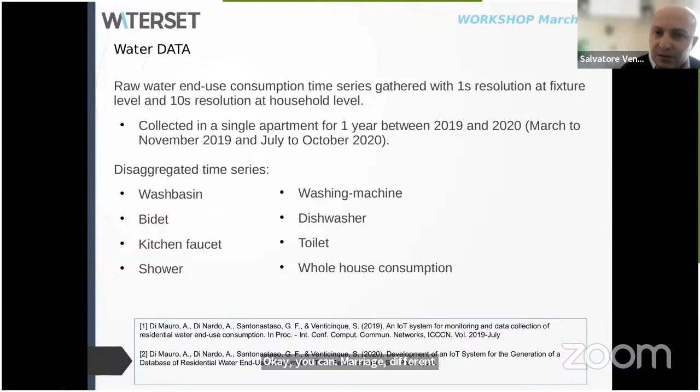Where you see different users, that is the simulation of a larger scale, and in that case you can replicate the same behavior of the same user. You can merge different profiles and vary the composition in terms of the heterogeneity of your sample.

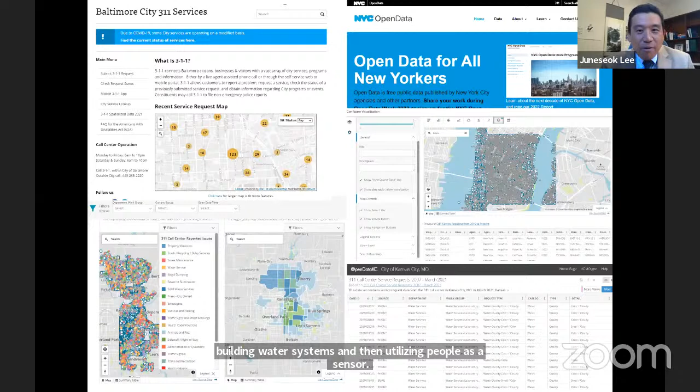Here's a snapshot of the open access data. On the left-hand side is the Baltimore City 311 service, which since around 2010 has been pretty active. Whatever problem citizens have, they call 311 or report via the 311 website. Here are some of the reported water quality related complaints. In this study we focused on New York City data, about 15,000 complaints over a few years.

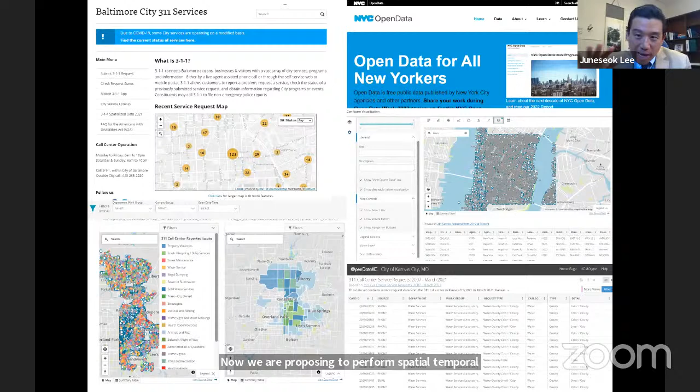Based on that, we are proposing to perform spatio-temporal analytics in terms of space and location. What's the trend? What are the hotspots? What are the emerging hotspots? What are the continuous hotspots? I hope that will be very helpful to the water utilities.

Yes, thank you for your work. I'm sorry. Okay, can I move on? Okay, yeah, please continue, please.

Based on this good actual data, we are proposing to apply different types of machine learning to find hidden trends or hidden patterns and make forecasting. Hopefully that will be useful for the water utilities in terms of their planning, operation, and management for the near future.

The objective is to perform spatial temporal analytics of observed water quality complaints, identify continuous hotspots, and develop machine learning and deep learning based time series models to forecast water quality complaints in different cities, such as New York City, Baltimore Maryland, and Kansas City Missouri.

And then we're going to compare the performance of machine learning, deep learning time series models, and have a better understanding of different types of machine learning, its capabilities, and also its limitations. And we want to make useful analytics-based recommendations for the water industry.

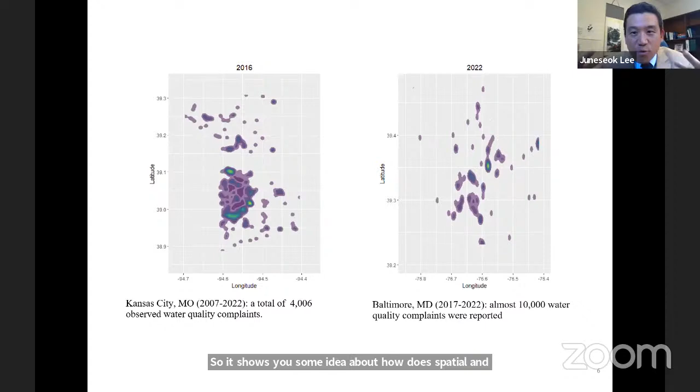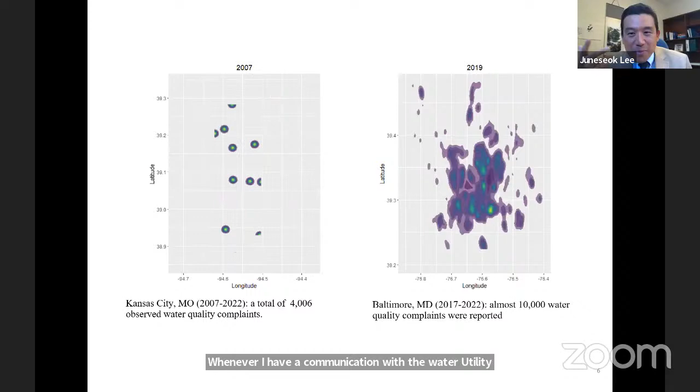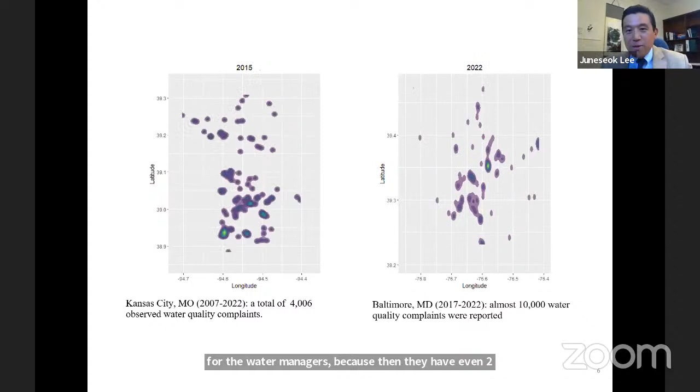Whenever I have communication with water utility directors or managers, these water quality complaints are really a pain in their neck for the water managers, because even at 2 a.m. or 3 a.m. in the morning, if there's a problem, they have to let the crews go outside and solve the problem. So how can we solve this problem?

The good thing is for the citizens, it's all transparent, but for the managers, the data is there, so it's their responsibility. So we'll have to solve the problem together, right?

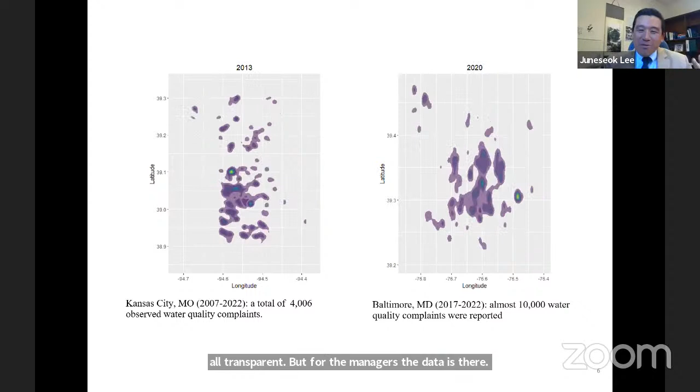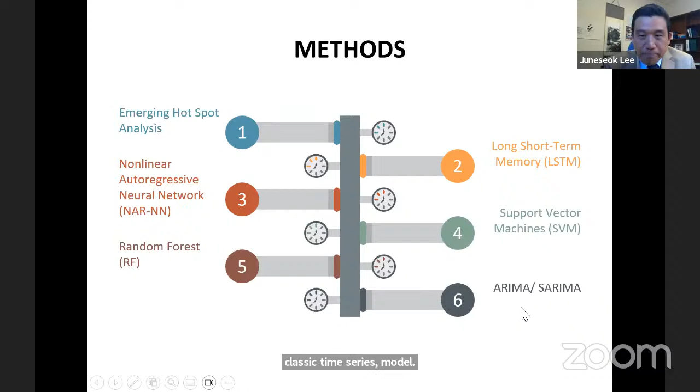So now, as mentioned, we're proposing to utilize spatial temporal hotspot analysis and different types of machine learning, for example LSTM (long short-term memory), nonlinear autoregressive neural network, the very famous SVM (support vector machine), and another very famous one, random forest. Today we are not reporting on, but we also considered very classic time series models such as ARIMA or SARIMA.

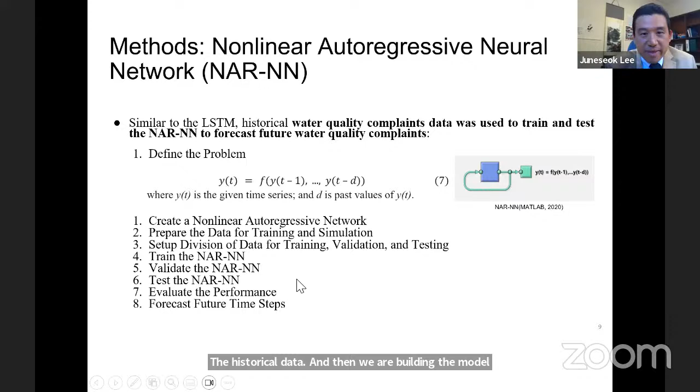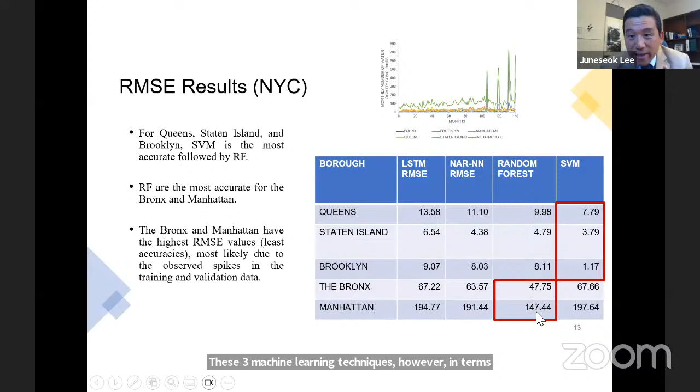Now this one is showing NYC's data. I'll talk in terms of root mean square error, RMSE result, which means the smaller, the better fit. If we compare Queens, Staten Island, or Brooklyn, it is very clear that SVM is showing the smallest RMSE values, meaning support vector machine is performing better than the other machine learning techniques. However, for Bronx and Manhattan, random forest is consistently doing a better job in forecasting, because the RMSE values compared to other machine learning methods show random forest performing better.

We thought about the reason, and it's most likely due to observed spikes in the training and validation data. Queens, Staten Island, and Brooklyn are consistently showing some near pseudo steady state. However, the Bronx and Manhattan show very unexpected high peaks in these three regions, in this time period. So we tentatively concluded that random forest is good for reflecting this unexpected spike compared to other machine learning methods. However, SVM is good for predicting in terms of pseudo steady state observation.

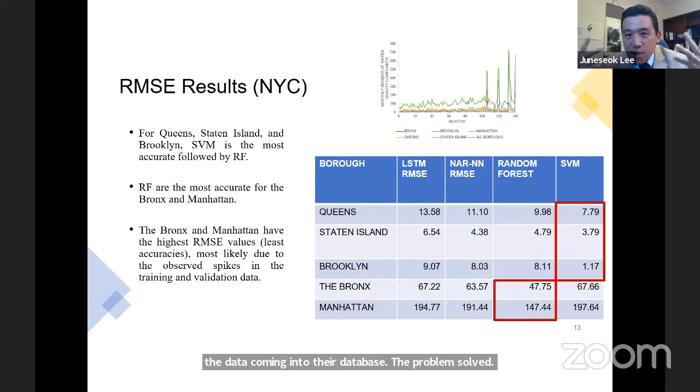We also communicated with the NYC DEP about why these three spikes are there in this specific time period. They don't know either, because those are the influx of data coming into their database. The problem is solved, but the causality, why it is happening, still bears further examination.

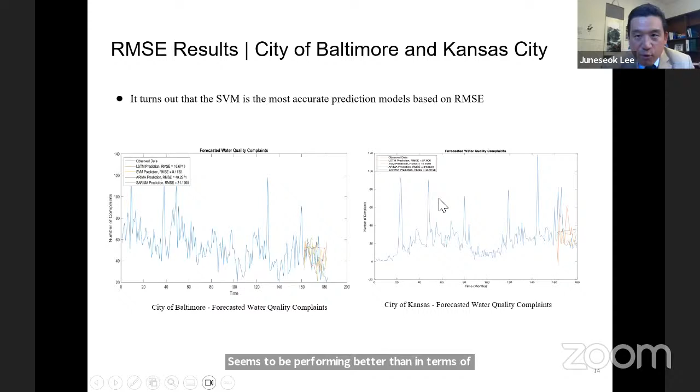My personal interest is very much in building water systems, premise plumbing, because people are the actual sensors living in that building, so they can report out in real time and also the real location.

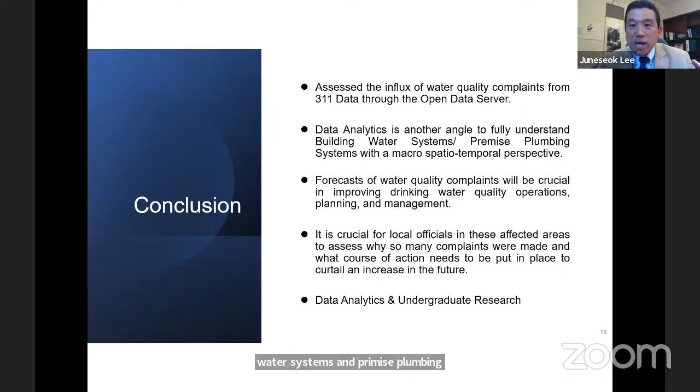So, in conclusion, we assess the influx of water quality complaints from 311 data, which is an open data server, so everyone can access that data. Data analytics is another angle to fully understand building water systems and premise plumbing systems with a macro level, spatial temporal perspective. I know lots of dedicated researchers devote their whole lives to understanding why lead is detached, like dissolved lead or particulate lead within the pipe system, using experiments or modeling. But this macro approach from the bigger scale, using data analytics, is also another way to approach the same problem about water quality issues in our water systems, and also decentralized water systems.

Forecasting of water quality complaints is very important in improving water quality operations, planning, and management, and crucial for local officials in affected areas to assess why so many complaints were made, and what course of action needs to be put in place to curtail or reduce an increase in the future.

So again, we solve this type of problem not just for us, but for the citizens, right? To help the water utilities supply water 24/7, 365 days, the best high quality water. That's our job.

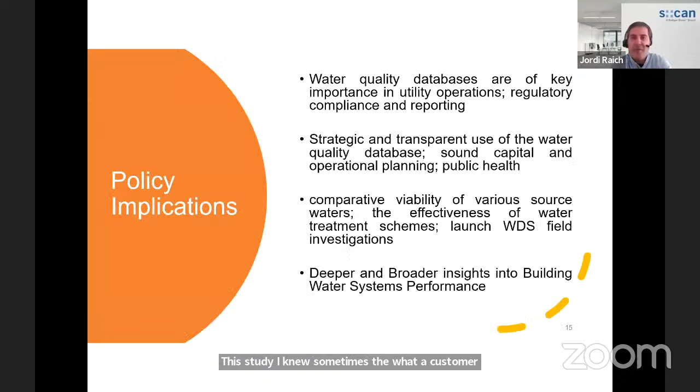Thank you. I have a comment first. I think it's very interesting, this study. I knew sometimes customer complaints are used as sensors, but this is the first time I see a study like this with so large a data set. I really enjoyed it. I have just one question.

Related to the 3 cities, were they chosen because of any relation to aging infrastructure? I'm asking because we did a project where we monitored wastewater in the city of Barcelona, and we chose 3 different districts with different income ratios: high income, mid income, and low income. The criteria was to see if there is any difference in how these districts behave at home, how they use water, etc. So I was wondering if there is also a criteria for these 3 cities, or maybe not.

Yes, that's an excellent comment, thank you so much. Actually, our follow-up study is about water equity issues. Right now we're simply displaying the water quality complaints and making a forecasting model, but we are overlaying it with household income level, education level, and median housing price levels. We're doing that in NYC, but unfortunately we couldn't find any correlation so far. That's on the to-do list as near future research. Water equity is a very hot topic these days, right? So, thank you.

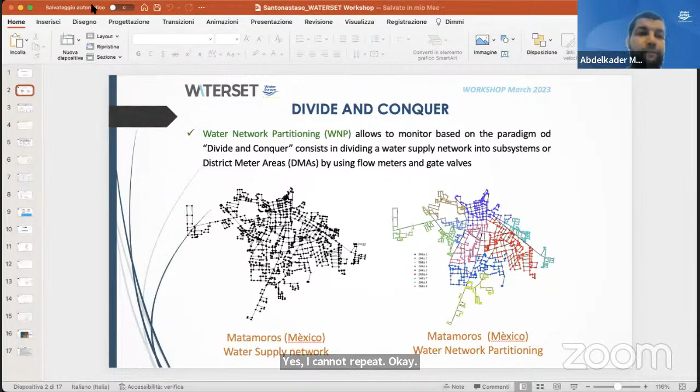Okay, just a moment. So maybe we lost Giovanni, he has some problem with connection. Maybe we can wait just 2 minutes and then go on, because we are out of time. Yeah, Giovanni, you are muted, can you unmute yourself? Do you see my screen? Yes, but do you see the slides? No, the slides, no, we see only the Zoom web page. So you are sharing your screen, but not the presentation. Okay, I can repeat. Now. Yes, so can you just make it so now you see my screen, my presentation mode? Yeah, okay perfect, thank you, sorry for the delay.

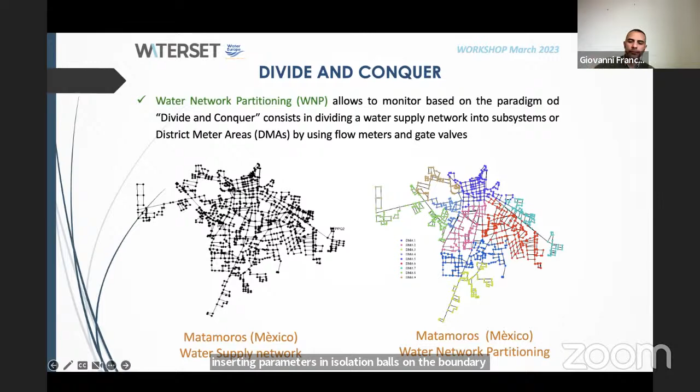So the idea of water network partitioning is based on the paradigm of divide and conquer. In general, it consists of dividing the water network into sub-networks called district metered areas, using flow meters and gate valves. Starting from the original layout of the network, we can obtain a water network partitioning by inserting flow meters and isolation valves on boundary pipes, which are pipes that connect different DMAs. There are two different approaches to the water network partitioning problem: the first is virtual partitioning, by inserting bidirectional flow meters on boundary pipes between DMAs, while the second is permanent water network partitioning, by inserting gate valves and flow meters on boundary pipes between DMAs.

In past years, the main advantages of water network partitioning are, of course, evaluation of water balance and minimum night flow, reduction of water losses by pressure management, monitoring network performance and water consumption, and protection from accidental and intentional contamination events.

But the main drawbacks are the reduction of network redundancy, because traditional water distribution systems are designed to be looped, increase of energy dissipation caused by pipe closure, and increase of management cost needed to buy, install, and repair flow meters and gate valves.

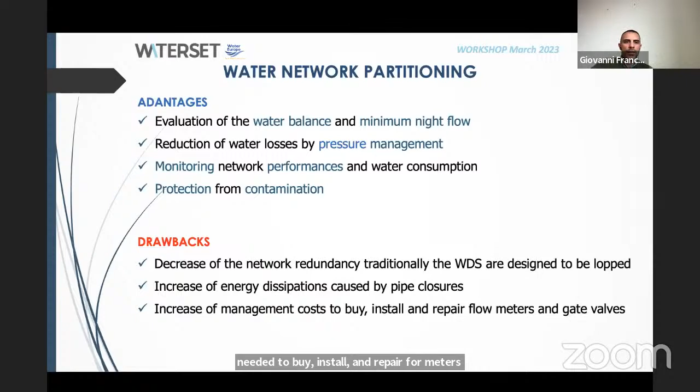In the past years, we can find in technical literature some suggestions about permanent DMA dimensions. For example, these suggestions are based on the number of inhabitants, from 1,000 up to 3,000, or from 2,000 up to 12,000 inhabitants, with a length of pipe from 5 kilometers to 30 kilometers.

Other suggestions are about the number of properties. For example, we can have small DMAs with 1,000 properties, medium DMAs with about 3,000 properties, up to large DMAs with up to 5,000 properties. But these suggestions are based only on empirical considerations and limited case studies.

So it's very difficult to apply this consideration to a large real water supply network. Generally in this context it can be useful to use an approach based on trial and error procedures, also combined with hydraulic simulation.

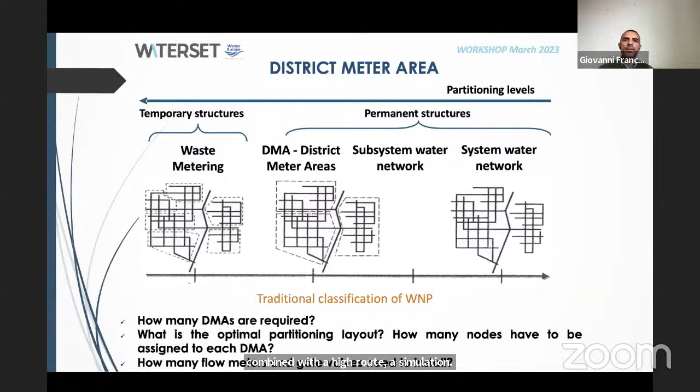Nowadays, several water network partitioning approaches have been proposed in the literature to find an optimal water network partitioning layout, and they are generally divided into phases. The first phase is clustering, and the second is dividing. The clustering phase aims to define the number, the shape, and the size of DMAs by minimizing the

number of boundary pipes or other pipe features such as length, diameter, and so on, while at the same time balancing the number of nodes of each cluster or other node features such as demand or elevation and so on.

The other phase, dividing, has the goal of selecting boundary pipes where to locate gate valves or flow meters in order to maintain the hydraulic performance of the system.

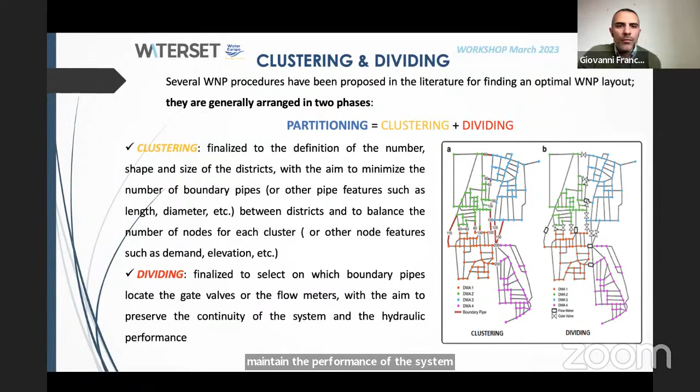More about the clustering phase: nowadays, the most used algorithm in scientific literature for the definition of clusters is graph partitioning, a technique of computer science developed in order to solve problems that need huge computational power, like simulation based on finite element methods that require distribution of the finite element mesh among different processors.

Another algorithm is community structure, which is part of social network theory. Specifically for this kind of algorithm, a network division is good if there are many edges within the clusters.

The last one is spectral clustering, which is a technique that exploits the properties of the spectrum of the adjacency matrix and the Laplacian matrix of the network graph. It is proved that spectral clustering provides an optimal solution to the problem of minimum cut set.

As for the dividing phase, or physical partitioning, which consists in defining the best location of flow meters on boundary pipes, some procedures are proposed in the literature. For example, iterative methods or optimization techniques that minimize the cost in terms of flow meters or installation cost and hydraulic performance deterioration.

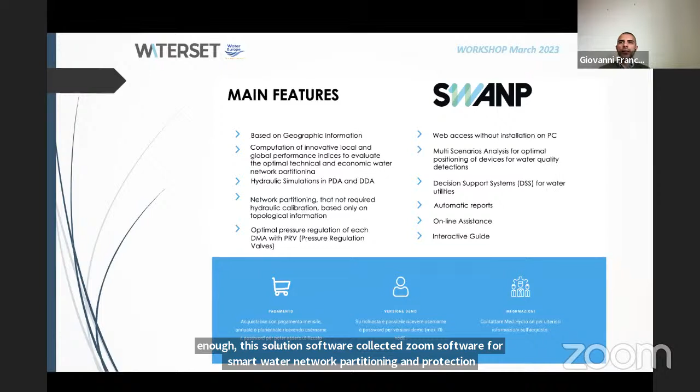SWANP is software based on a geographic information system. It calculates innovative local and global performance indices to evaluate and compare different layouts of water distribution networks. It can compute network partitioning based only on topological information, without the availability of a hydraulically calibrated model of the network, and

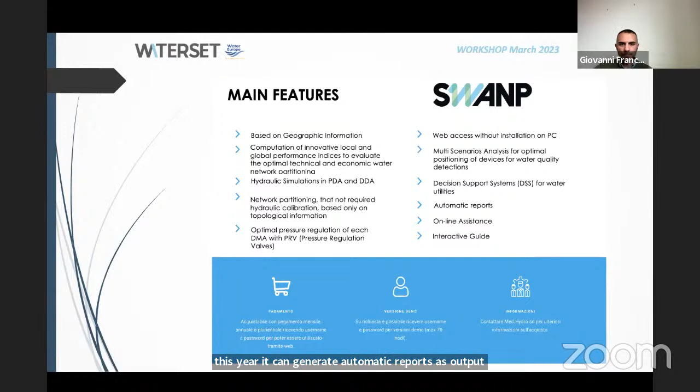also provides multi-scenario analysis for optimal positioning of water quality sensors. Additionally, it can generate automatic reports as output, and it can provide a decision support system for water utilities. The software can be accessed online with a username and password via the following link: swamp.net.

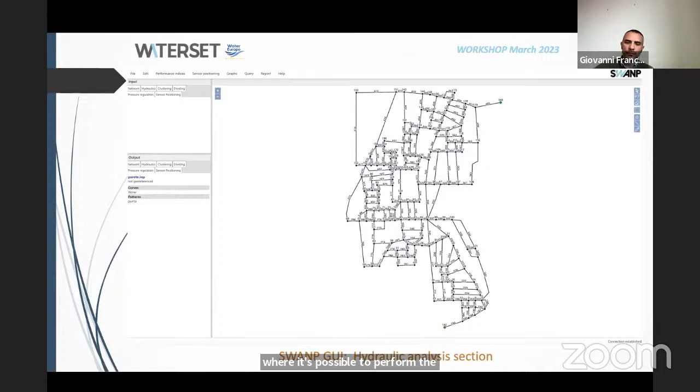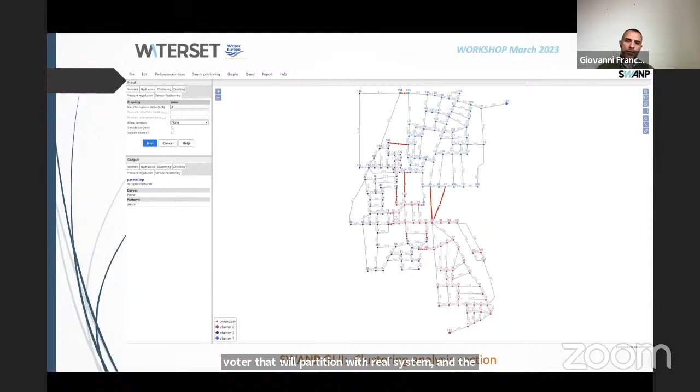The workflow is based on two sequential phases: clustering and partitioning. And specifically in this slide, the graphical results of the clustering phase can be seen.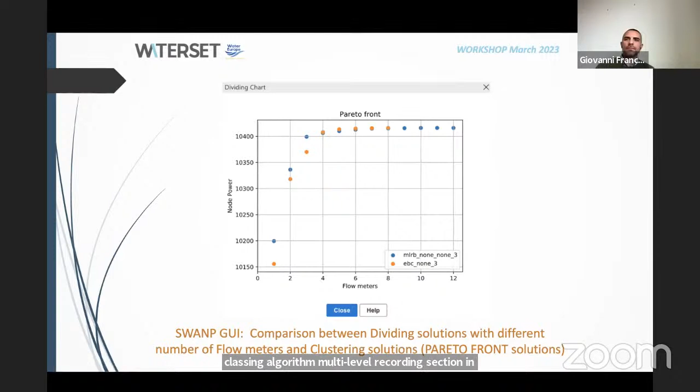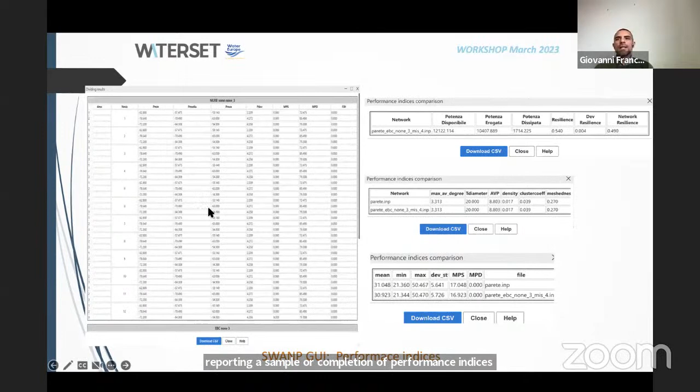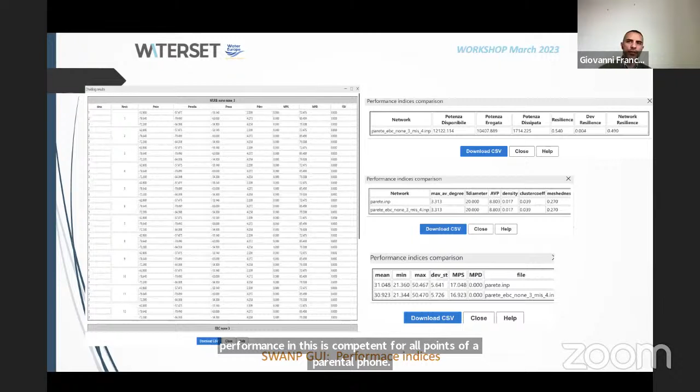Then, in this last slide, we are reporting a sample calculation of performance indices. In this part of the slide, we can see the hydraulic performance indices computed for all points of the Pareto front. In addition, it's possible to compare a specific water partitioning layout with the original network layout, and this result can also be downloaded as a CSV file for further processing.

So, thank you for your attention.

Thank you very much, Giovanni. Thank you for your presentation. We will just maybe take one question from the chat. Are there any information on the average flow?

Average flows during the day in a typical DMA? Yes, we have the possibility to analyze a single DMA. Also, in case you want to visualize the variation of flow inside a single DMA, the results can be extracted by computing performance indexes.

Because we can compute performance indices, and all the performance indices with also indication of flows inside each DMA can be extracted by the software.

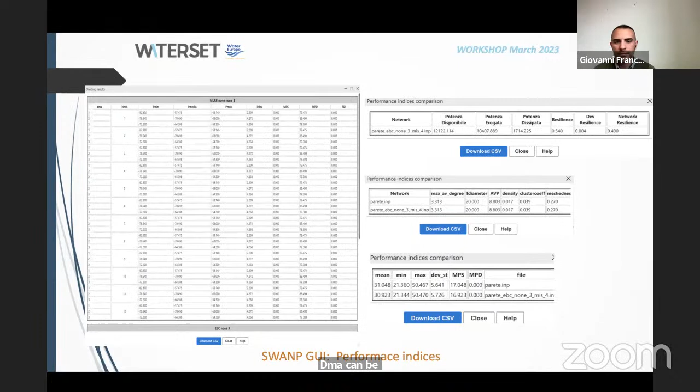Okay, thank you very much, Giovanni. Thank you too. I would like to thank all our speakers for this first session.

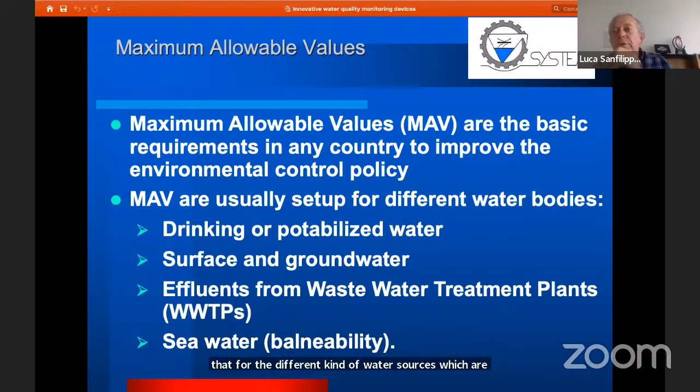Here, okay good, sorry. So my presentation is concerning innovative water quality monitoring devices. As anticipated, I want to tell you that most of the water quality monitoring market is managed by the requirement of maximum allowable values, which are the values that should be followed, not to overlap some threshold levels. The regulation in each country requires, for different kinds of water sources, what the limits are, and according to the limits, there is the need to do monitoring.

Of course, monitoring in the general sense also means when you go and collect a water sample on a monthly basis, then bring it to the lab and do the measurement. The monitoring becomes more consistent when there is more data, and when there is the need of collecting samples more than once per day. Usually this is very difficult to perform during lab measurement, because even the collection operativity, when you do two or three samples per day, is practically impossible - no one is using this.

And so when you have the need to measure more than one or two samples per day, then there is the need to have online monitoring.

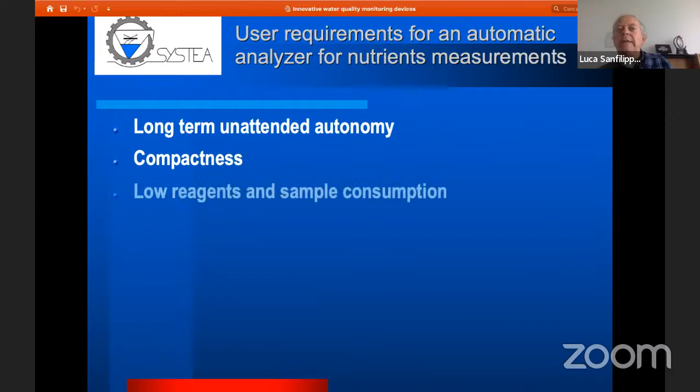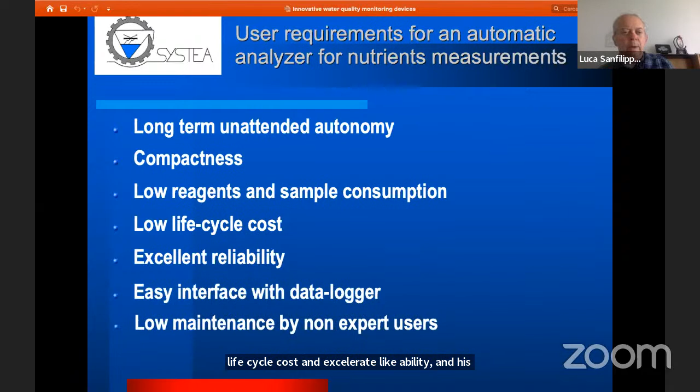According to a review done many years ago, for example for a nutrients analyzer that measures ammonia, nitrate, or phosphate parameters, the requirements requested by users are usually long-term unattended autonomy, a certain compactness, low reagents and sample consumption, low life cycle cost, excellent reliability, easy interface with data logger to send the data somewhere, and low maintenance by non-expert users.

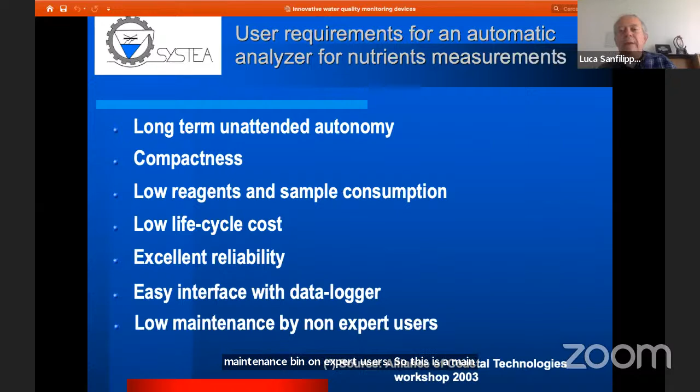This is the main requirement for this type of analyzer, but for an analyzer to measure wastewater treatment plant parameters it's more or less the same, or for a sensor.

In my presentation I don't speak about sensors, because our company specializes in automating methods based on different types of analytical methods that are usually done in the lab but can also be applied to automation. So our main expertise is wet chemistry spectrophotometry, which can be applied to measure a wide range of chemical compounds.

Other analyzers are based on fluorimetry, which has also been used in the last 10 years in small sensor devices. These can reliably detect even hydrocarbons or chlorophyll in water, or, for example, a method widely applied for seawater analysis to measure ammonia using fluorimetry with a reagent—meaning it's a wet chemistry method.

Then there is the wide range of applications of UV absorption-directed methods, mainly used to measure organics, nitrate, color, and other parameters. The next speaker will probably speak widely about this type of analytical method.

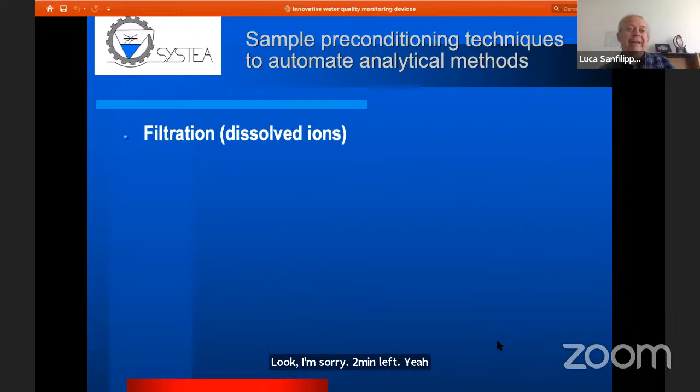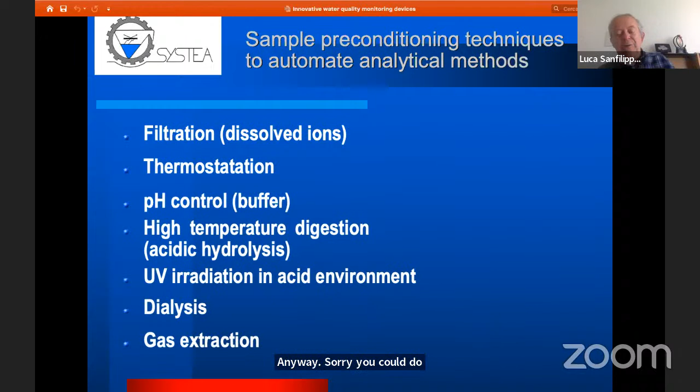So these are the typical methods that can be used to pre-treat the sample. Anyway, sorry, you could say the same even for the previous speakers, not only to me, but anyway, now I'm here and I'll try to manage.

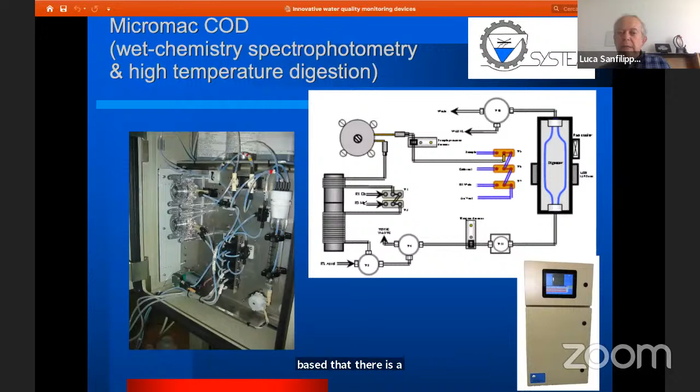This is a typical example of a wet chemistry based analyzer that measures COD using a wet chemistry method and a spectrophotometric method.

And this is a particular integration of two types of analytical methods, spectrophotometry and fluorimetry.

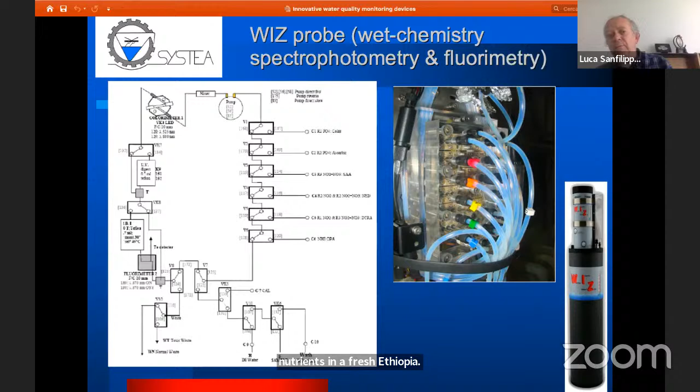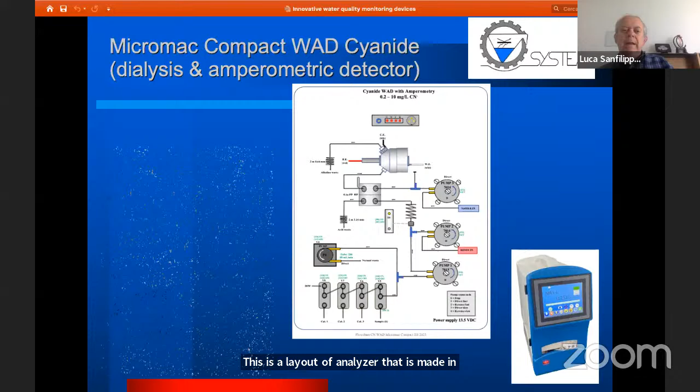This is a layout of an analyzer made in a portable way, which we named benchtop. This type of analyzer applies an analytical method to measure cyanide using an amperometric sensor, showing that these are real applications, real commercial products based on this type of technology.

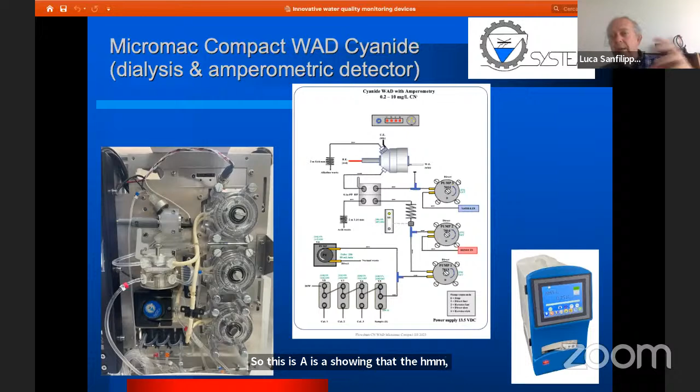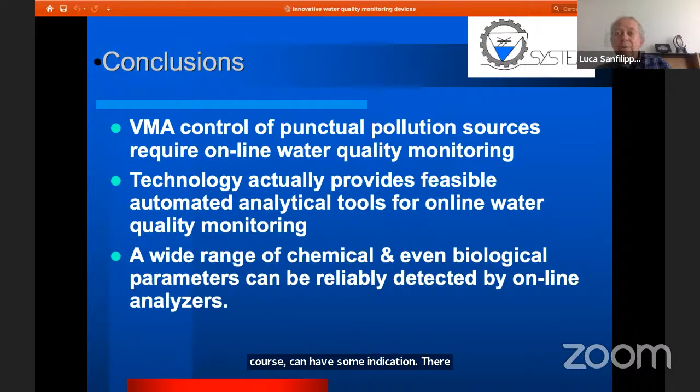So the conclusion is that to control these threshold levels in any kind of water, there are a lot of analytical tools automated that of course can have some limitations. As already mentioned in a previous talk, also quite high cost, but they can provide accurate and reproducible detection of a lot of parameters.

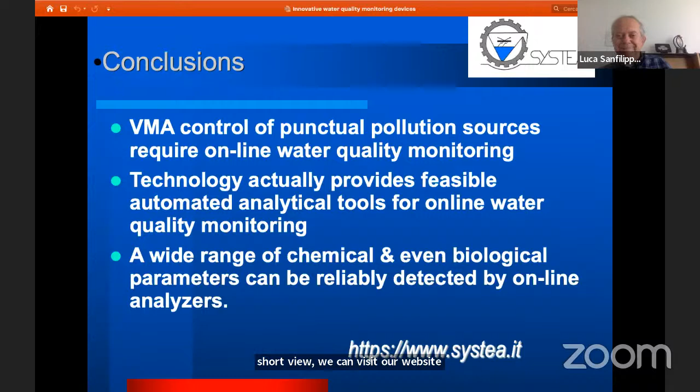Thank you, Luca, thank you very much indeed. I am impressed about the number of devices you have in your catalog, let's say.

And putting on the cloth of someone managing water services, thinking about online monitoring devices like the ones you showed, by treatment facilities or by a control section along the distribution system, it could be difficult to find the right place. I think in the forthcoming time, maybe working on devices being smaller, in order to be put inside manholes or whatever, but I recognize it's quite difficult. I am impressed also about the problem that smaller sometimes is not fitting in actual technology with the accuracy requested to achieve control of these thresholds. But maybe quite low accuracy could be enough for the purpose.

But talking about the last slide you showed, about monitoring bacteria, I wonder if you had to face problems in terms of concentration of your sample, because the device can work if you put the water inside the device, but the sample could not be representative of the whole water matrix. I wonder if you thought about the possibility to concentrate the sample before injecting water into this analyzer, which is based on an ISO method that is based on a very well-known method to detect bacteria in water, named Colilert 18.

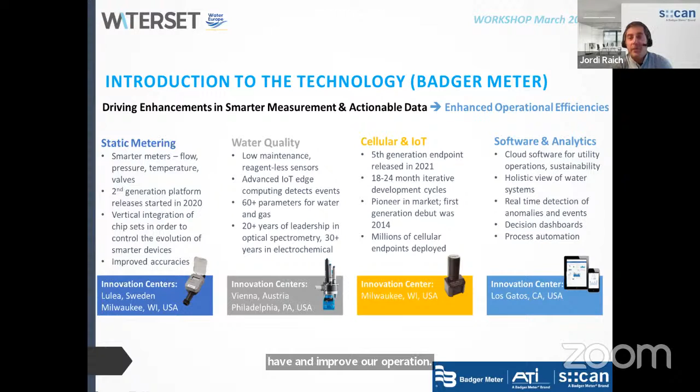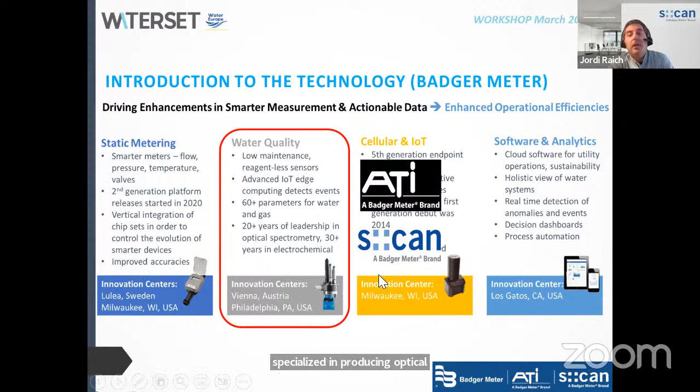As you said in my introduction, we are s::can, part of Badger Meter. s::can's owner was Andreas Weingartner, who I had the pleasure to work with for many years. Now, together with ATI, we are part of Badger Meter. ATI is a company specialized in producing electrochemical sensors, and we are more specialized in producing optical sensors, so it's a perfect match to provide good solutions across many parameters.

In ATI, for many years, one of the topics kept in mind in the innovation department was to offer solutions not dependent on a power supply. Through the years, this solution was developed using ultra-low powered, smart and digital M-node sensor technology, so you can have these systems in either a fixed or mobile solution, modular systems to plug in as many sensors as you wish for water quality, with a certain number of parameters, and monitor without the need of a power supply, using an autonomous battery solution.

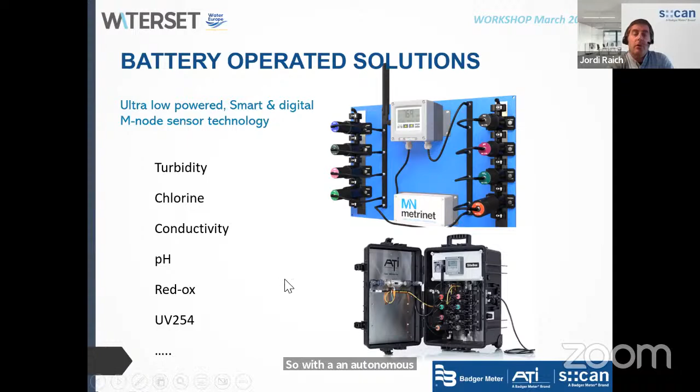In s::can, another topic we kept in mind was water scarcity - there's no need to discharge water when we monitor, so there's no water loss. We developed what we call the pipe::scan system, which can be placed on top of a pipe in the network, where water enters our solution, flows through the different chambers, and goes back to the same pipe.

For that, we have a nano pump that helps, and as previous speakers have said, we have different sensors - electrochemical, but also optical, based on UV or UV-Vis. For these sensors, we have automatic cleaning, like this brush you can see here, to keep maintenance as low as possible, offering a solution where you can monitor turbidity, chlorine, conductivity, pH, organic carbon, etc.

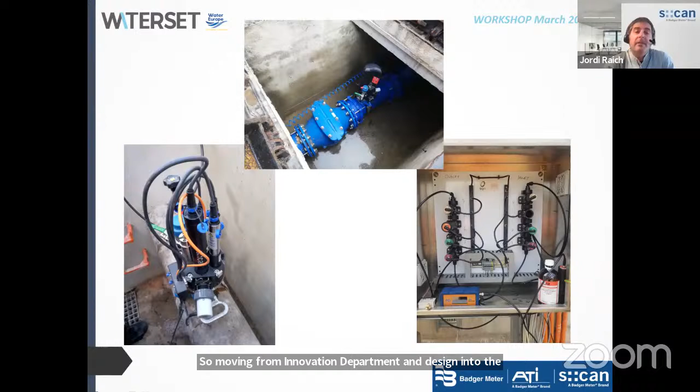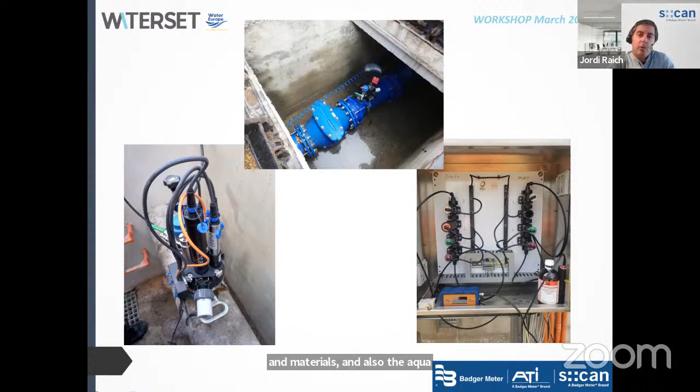So here we see how this system looks in the real case. Moving from the innovation department and design into the real application, you can see pipe scans being installed in pipes of different dimensions and materials, and also the metrinet being installed in different locations, some of them, as you can see here, very remote.

But as you all know, these remote areas at the very end of the network are where you also have more quality episodes because of lack of chlorine, etc. And therefore they need to be properly controlled. So when you have a system like this, you can deploy sensorization in the network, in the plant, etc.

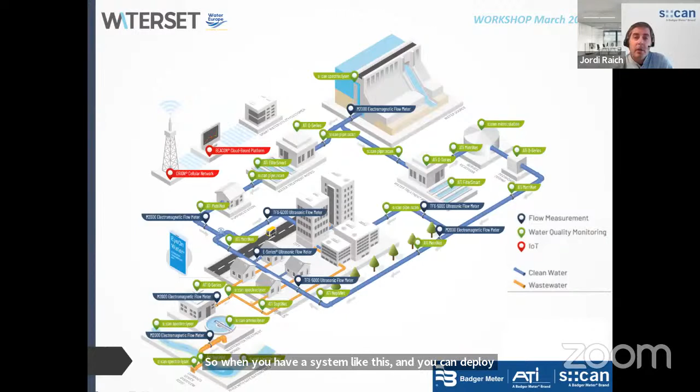And the same peaks, of course, with much less intensity, but with this we can prove that we can control the water since it's being produced, treated, until it's in the network, in the city center, or in a reservoir, and we can validate then also our hydraulic models.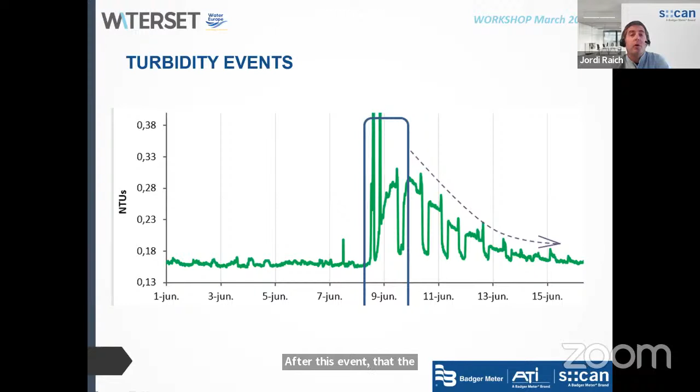We are also innovative and open to integrate solutions that we don't manufacture. For example, when we need to provide, in addition to physical-chemical properties, a solution for microbial monitoring, we are open to integrate other brands' and manufacturers' solutions into our hardware, but also our software, so that all the data is transferred from our system with all the data analytics to the end user.

So finally, I can say that with all these solutions, we can provide a good compromise for the water safety plans, to have water under control, but also to have a good security approach. In the US, two words are used, while here sometimes we only refer to safety. In Spanish, we only have one word to say safety or security, but these are two different concepts.

In case there would be accidental or intentional contamination, we need sensors to detect it fast and be able to react fast and take decisions. So this sensorization is also helping in this way.

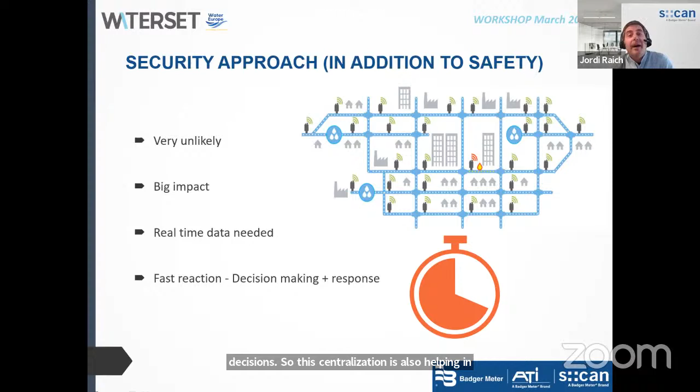Okay, thank you very much. Indeed, I don't know if there are questions about the nice presentation you gave. Otherwise, I can introduce the following speaker, which is Sergio Martinez.

Sergio Martinez is a technical engineer. He developed embedded electronic systems and wireless communication for critical environments. Since 2011, he has worked at Leitat, the company where he is now, where he provided comprehensive solutions to clients based on the development of intelligent systems with embedded software and with data and image processing. At the time being, he is leading the business area related to artificial intelligence and software engineering. He will tell us about research on smart devices.

And please, Sergio, go on with your presentation. Thank you. Oh, thank you, Nicola. Can you see the screen? Yes. Okay, thank you for the introduction. Thank you for the invitation. I will try to provide you a very brief explanation.

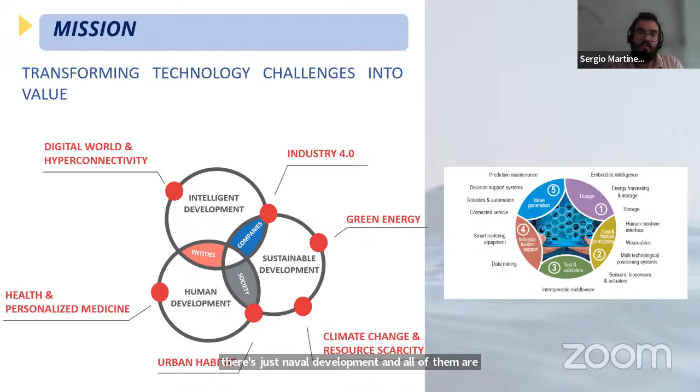So mainly from my point of view, a technological point of view, there are some different agencies in the field of water quality and water monitoring. The first one, principal for me, is water scarcity. There's a high problem with that. There's an increasing figure on water consumption due to the growing population. There's high energy costs in the treatment of water. Finally, we have a problem with non-revenue water, that is the one that has an origin but never reaches the destiny.

So from a technological or societal point of view, we have three main challenges: to use the water more effectively, to minimize the treatments, minimize the cost, even in time, even in energy costs and resources. And the third one is the distribution - it's important to distribute without leaks.

Over there, there are some political guidelines, some political best practices that we need to follow up in order to reach the Sustainable Development Goals. So there are some different Sustainable Development Goals related to water quality, water monitoring, and water itself. So it's important to be compliant with EU, international, and national legislation.

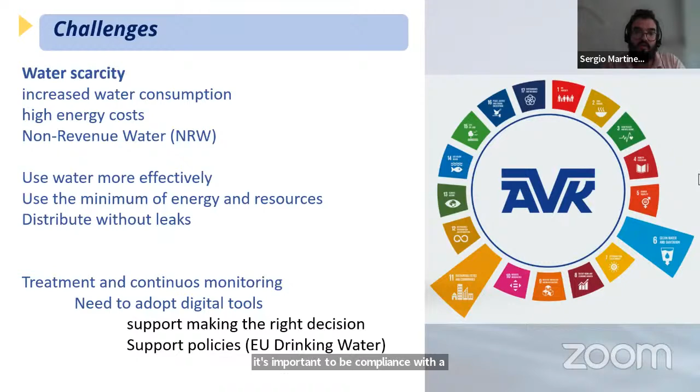So mainly, as I laid out, we plan to provide a holistic overview, a holistic approach, instead of using single technologies working like silos. Instead, we plan to provide a cooperative environment where different technologies - for instance photonics, additive manufacturing, artificial intelligence, electronics - can meet together and provide some kind of extra added value solution.

So now I go to the point - what we are working on now in Leitat in terms of water quality, water monitoring, and in general in the water sector. The first project that I want to show you is one related to water pipeline inspection.

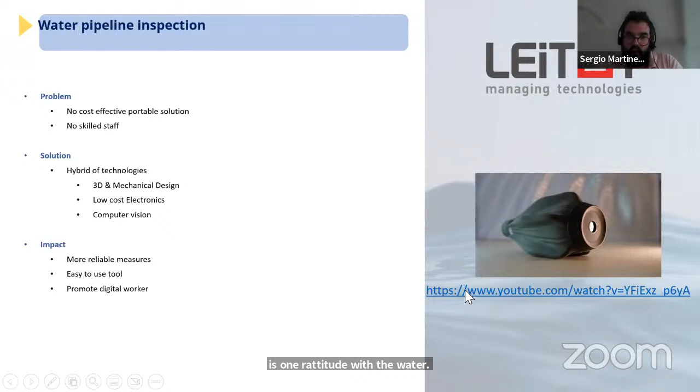Okay, let's see if it works. Apologies because it's not in English, but I will try to explain to you in the meantime.

This is working. The main idea behind it: we have a water utility here in the Catalonia region that used to perform visual inspection of the water pipes. They have a problem that the solutions they are running are out of date, are not operative, and mainly they have tools from one use. So they came to us and said, let us see how you can support.

And we said, maybe we can design something using additive manufacturing and a handmade design for you that can support your inspection. So the first thing we do is perform an additive manufacturing study, a mechanical design of how the system should be. After that we put some electronics and camera systems, some imagery, in order to have data collection. At the end we put some artificial intelligence algorithms over the data collection, and the idea was to provide real-time decision, real-time inspection, real-time monitoring of the pipes.

So at the end, nowadays this is a solution that is currently running in the Barcelona area. They have a solution that is fully operative and fully working. The most important thing is that it's usable, because sometimes the operator, the person working in the field, says 'I don't want the technology.' So the idea is to use technology that can be adaptable by the users. Here you have some pictures of how the system looks from a user point of view - it allows an easy inspection of the pipelines.

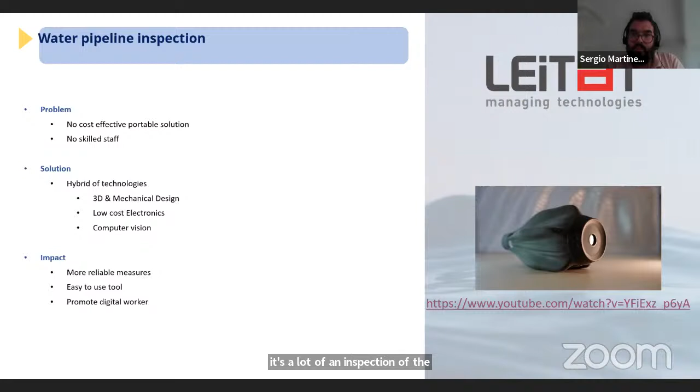The second thing that I want to show you is not only a matter of technology, it's a matter of stocks, a matter of proprietary bases. You have some tools in order to monitor your water quality, some pieces to perform some activity, some pumps, whatever. Sometimes when it's broken you need to go to the manufacturer, ask for that, wait a time, pay the invoice, and so on. Sometimes the replacements are very, very expensive in cost and in time.

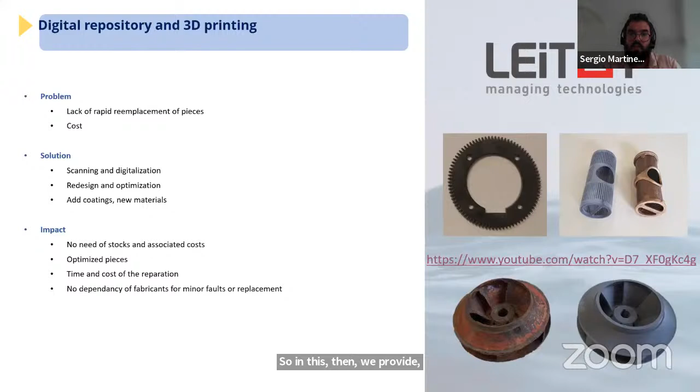So the idea was to create a catalog of digital components and create a digital twin - not a digital twin of the water or the cycle, instead a digital twin of the piece. So in this term, we support the company by creating digitalized pieces, digitalized components, and training them about how to manufacture this piece by its own. So in terms of when the piece is broken, we have a day-zero replacement of the piece.

The third project I want to show you is a project for aquaculture, where one of my problems is the problem of third-party components. You put a sensor, you need to provide, buy a license, buy a software, buy the sensor itself, and sometimes it's very hard to manage the aquaculture system from a whole point of view. So the idea was to create a middleware to provide a data space, to allow very easy integration of components and to reduce operation costs.

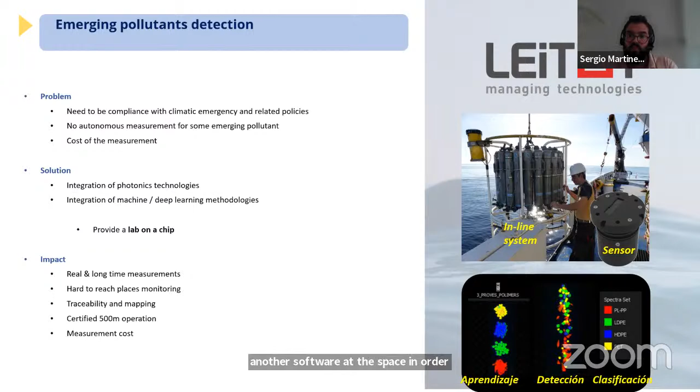And the last one I want to show you, I'm going very fast because I know we are out of time, even if it's not my fault. But sometimes when you are the last one, you need to pay the price. In any case, the last one I want to show you is the Astral sensor.

This is the ASTRAL and Iliad, a microplastic sensor. One of the problems currently facing the European Commission and member states is that it's mandatory to measure some pollutants, especially emerging pollutants. For temperature, chlorophyll, pH, there are a lot of tools, but for innovative pollutants there are no tools, and you need to go to a lab. Even some of them have no reference standard methods to measure, the microplastic for instance.

So we were working for a long time to provide a combination of electronics, photonics, artificial intelligence to provide a tool that will be able to measure microplastics online. Here you can see a simulation in a lab, using semi-filtered data, so that we have no interference, we only have microplastic and water, and we are able to measure 300, 400 micrometer particles in real time.

It's a portable device, you can see on the left side, and the idea is to provide to companies, but especially to research institutions and aquaculture institutions, a portable device that can support them to measure microplastics. That, as you know, is one of the trending topics around the world about pollution.

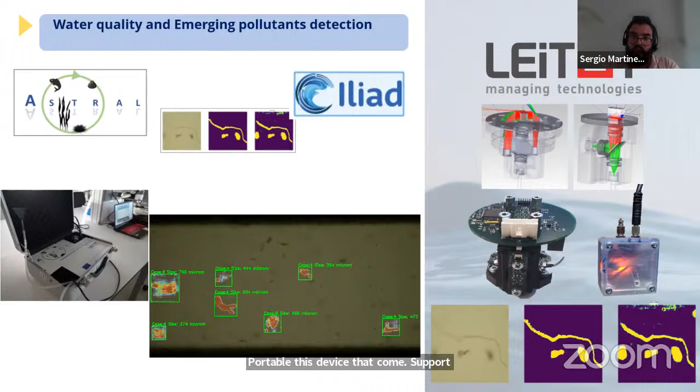I can see there is a question from the audience, particularly dealing with the pipe inspection tool. They are asking which data are generated, whether qualitative or quantitative, and if the device can be used while the pipe is in operation. I think a big issue is to inject and to recover the device at the end.

Yeah, in fact it's a good question, because it needs to be used when the pipeline is in operation. Otherwise, the fluidic system used to impulse the device is not working. We need to move water in order to move it forward. It needs to be recovered by humans, this is true, but the operation to advance is done by fluidic movement, by moving the water that is in line. So the pipeline needs to be in operation, needs to have a lot of water there.

In the first prototype, it's only qualitative data. It's an image, a stream of video, and a human is watching the video and saying, okay, it's stuck or not. In the second version we are currently working on, we are including artificial intelligence to provide autonomous decision, autonomous information to say something is broken or ready to break, and we also plan to integrate extra information, for instance turbidity or colorimetry, to say something can be wrong or not.